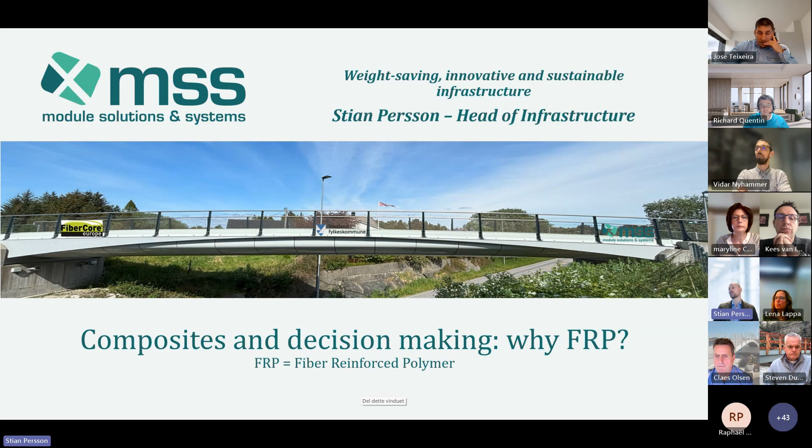I will move on, just a little bit about who we are. The company I'm representing, MSS, has a 20 year history of offshore solutions.

The last 6 years especially, we have really driven the focus on shore and on bridges. By now we have delivered 12 bridges in Norway in FRP, and number 13 is actually in detail engineering now and will be installed in June next year. So we're starting to get some experience here.

We work as an agent in the Nordic countries, but we're also the owner of FiberCore Europe, which has delivered close to 2,000 bridges worldwide. So this is nothing new. I can mention that FiberCore is specialized in vacuum infusion, and they're using the InfraCore Inside technology.

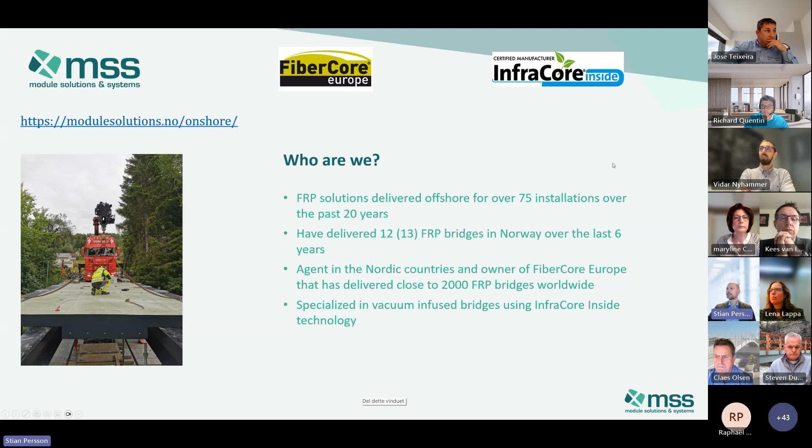Just a little bit of my background, because what I'm going to start speaking about and the bridges I will mention is based on my previous experience as the client side. I started out with 11 years in the Norwegian Public Roads Administration, and it was really there it all started back in 2014 when I was the head of the bridges section there.

So the 2 bridges I will mention later are in the background of that. That's why I just wanted to show you this background so you get that experience. I also have experience from the consultant side, following up the bridges and supporting the client when it went over to the county, and now I'm the head of infrastructure in MSS.

Okay, you probably have noticed Paradis pedestrian bridge, which is a world record and also one of the Innovation Award finalists in the JEC world.

So I will just tell you a little bit about the timeline of this bridge, because it all started in 2014 when I was in the lead of the NPRA, where we started to look into a preliminary design and concept approval for a bridge in FRP. This took a year, it's a big process, a lot to learn. At that time, we hired in Royal Haskoning, and also used consultancy Multiconsult to do everything around the bridge.

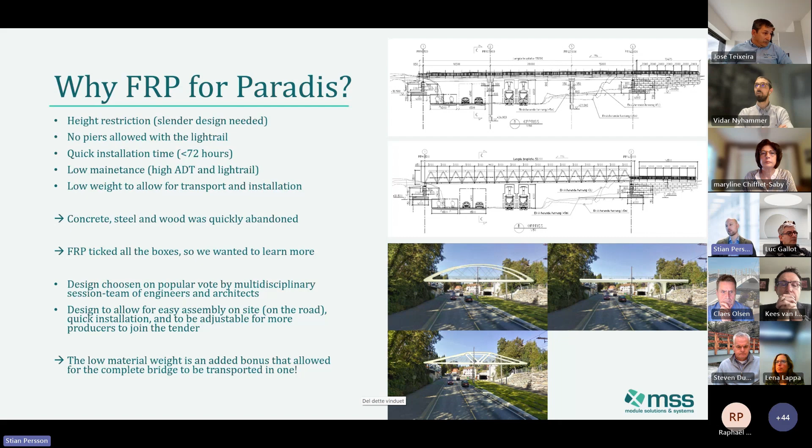And it turns out that the low material weight was a pretty good added bonus that actually allowed us to build this complete structure at once, and produce, freight, lift and install everything at once. So that was a great bonus.

We started looking into the concept design in 2014 and 2015. At that time, we had a new handbook coming out with a new demand: the underside and edges of any bridges spanning over railways, light rails, 4-lane highways, or roads with annual daily traffic of 8,000 or more, had to be made out of materials that need no planned maintenance. That rules out steel and wood. So this was really the push we needed to go forward with something different.

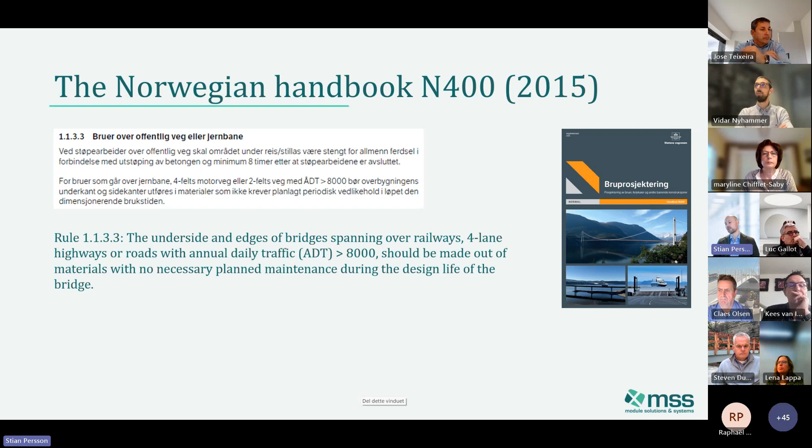It's worth mentioning that from this year we also have another edition in the rule book saying any choice of bridge type and material has to be justified and optimized with regards to sustainability and emergency preparedness, so we get the CO2 emissions into account. It wasn't a point when we started, but now it is. It turns out FRP is actually half the CO2 emissions compared to concrete, so that's another added bonus.

So we had solved the restriction and bridge concepts. How did we put this out in the market? We had never done this before. We knew we wanted to test this out, but going out with a world record for the first bridge was a bit risky. So we had another bridge, half the span, around 24 meters, called Vardebrua, the first one I showed. We decided to divide the substructure, the abutments, from the superstructure so we could get just the producers in and work together with them. We decided to go for a design and construct contract with negotiations because we knew we weren't able to nail it right away.

The substructure was done by the NPRA themselves, when I was there. The concept design was done in 2019. We also had Royal Haskoning with us at that time. It tendered in 2020 and opened now in 2022. This was built by MSS and FiberCore.

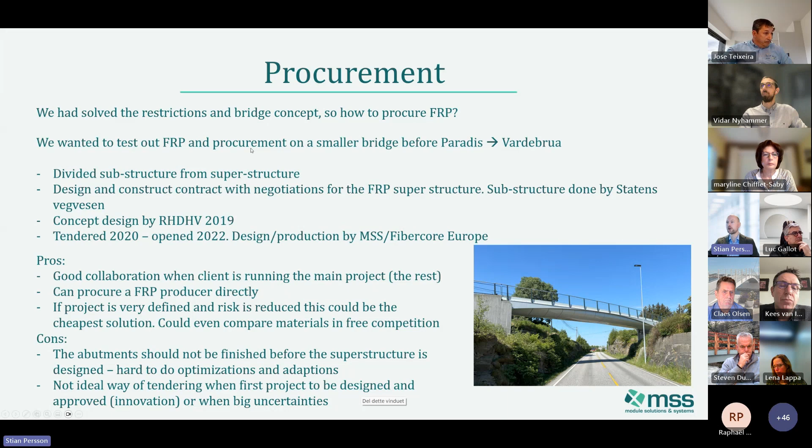So what we learned from that process is that we needed an extra process to reduce that risk. For this part, we decided to add an interaction phase in the design-construct contract. We still divided the superstructure, and I actually engineered the substructure here. The first phase was a collaboration phase, based on hourly paid work, until the complete design was approved by the authorities. This was a very good way of collaborating - we were able to work together, and everybody brought their background and experience, which gave us the best result.

After the design was approved, the price was set and it was turned into a standard turnkey contract. Of course, the client has to take more of the risk in this phase, but this is the only way to get innovation. Somebody has to push this forward, and it has to be the client. So it's very ideal for learning.

Finally, we did struggle a bit with the rules when we all started. Back in 2014, we really had not much to look at. We had the Dutch CUR 96 version, and first in 2019 we got the English version. But based on this process, the newest version of the handbook now has opened for using any of these standards, both the English CUR 96 and the Norwegian DNV rules. We did comparisons, both in early stage and later in detailed design, between the two standards, and they are pretty much similar.

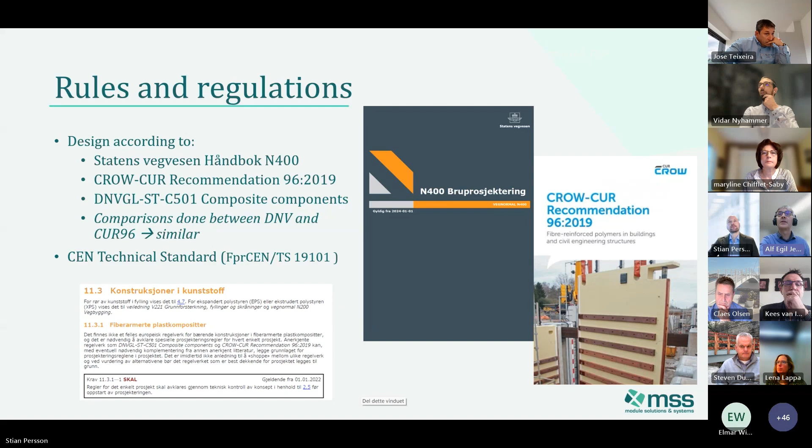It shows now in the picture. It shows. Okay. Yes, thank you.

My name is Alf Jensen. I am the CEO of FiReCo, working with structural engineering for this bridge. I'll talk a little bit about the regulatory framework and design of composites. So switch to the next.

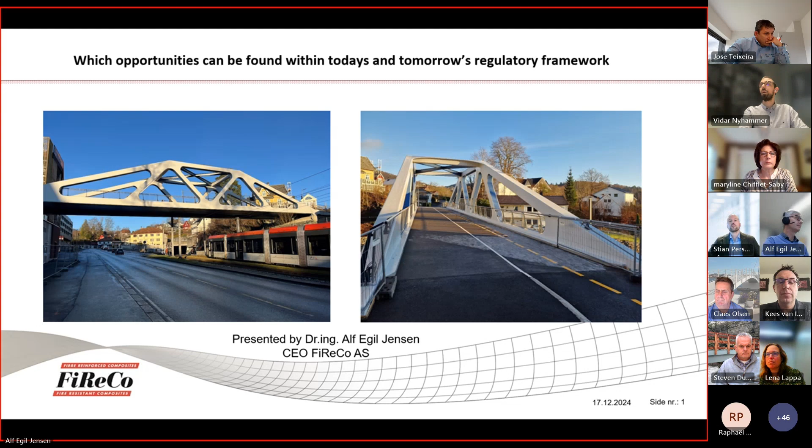Our company was founded 30 years ago, and our core business is engineering and consultancy within large composite structures like ships, boats, and offshore structures, but also in recent years, some bridges. You could look at our homepage to see more of what we are doing.

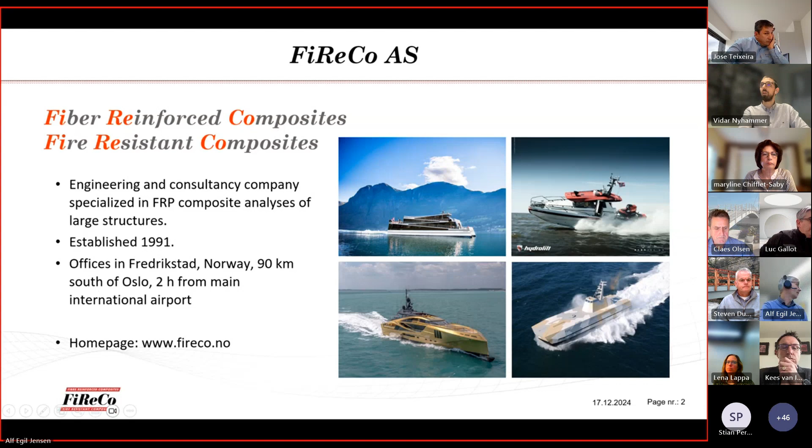The bridges we have done: in 2003, we had the 56-meter movable Fredrikstad Bridge. It was the first large movable composite bridge in Europe. And in 2020, we had a pedestrian bridge along with a road bridge. It was 9-10 meter elements that were lifted in place. There's also a railroad going underneath the bridge, so it was very important to have a prefabricated solution.

And it's the same for the Paradise Bridge. The city train passes underneath, so we needed something above. Also, we could not stop the city train for many weeks, so they needed a prefabricated solution for this location as well.

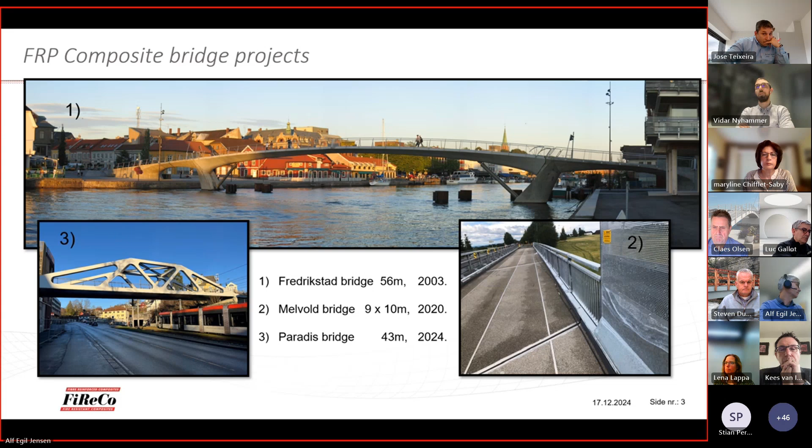So to the rules for FRP composites in Europe, of course it's the Euro codes, for the actions and the structural design, and all of this is standard Euro codes. And as you know, there are standard codes for steel, concrete, aluminum, wood, etc.

But we still haven't got the composite code, though it's under trial. It's now got a number, 19101, and it will probably be in line with the rest by 2025, 2026. So then we'll finally have a complete Eurocode set also for composites.

In Norway, we have a handbook, the N400, which gives the Norwegian special rules and how to do this within Norwegian laws. And as Stian told you, they opened up for using other standards when they are relevant and applicable. So we have used CUR 96, and of course, since we're working with boats, we know the DNV standards, both for offshore, the C501, and for high-speed light craft, which are the ship rules from DNV.

The high-speed light craft rules have had composites since 1985. So a lot of composite vessels have been designed with this standard, so it's a good and well worked-through standard for composites.

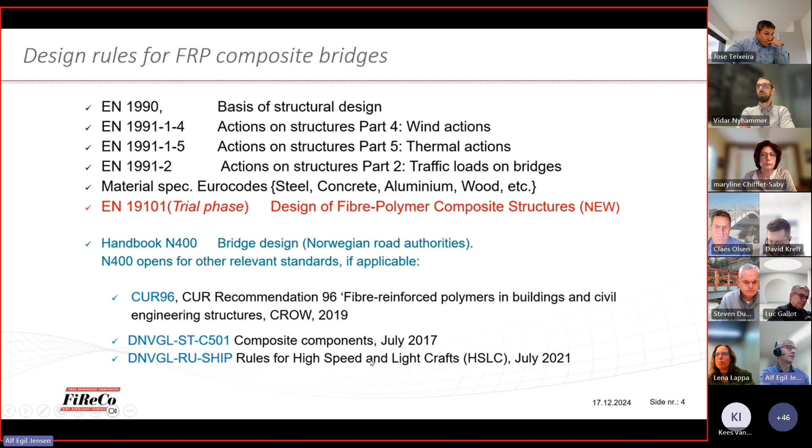So to the Paradise Bridge: it's stated as a new and groundbreaking design, and when looking into the Eurocodes, in Annex B, you see that we end up with consequence class 3, reliability class 3, and this implies the execution class will be 3, and we have full third-party verification of the design.

That could be challenging, and I will go through some of the challenges when you end up in this regime.

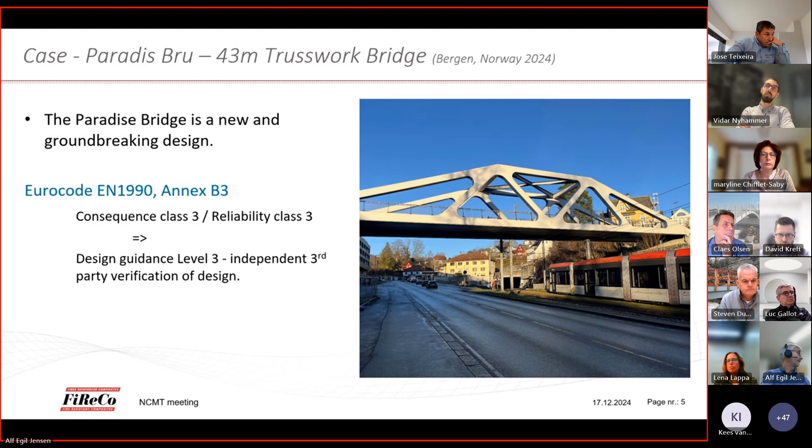In our case, we ended up with an 18-month process with the government, with a lot of back and forth in order to get all the control points in place.

Some of this process was due to our lack of knowledge in using the Eurocodes, since we come from the shipbuilding industry, so we are more used to DNV standards and class societies than the Eurocodes. But it was also a lack of experience in composite materials from the third-party surveyors. They didn't have the same experience as us with composites, so there was some misunderstanding and a lot of back and forth to clarify that.

And since we used CUR 96 and the DNV standards, we had to convince them that these gave the same reliability level and safety level as the Eurocodes.

So there are some inconsistencies in the Eurocode library when you bring in the composite standard, and I think you will also meet this when you use the new Eurocode for composites. It doesn't really fit perfectly at the moment.

So I've given some points here which you should be aware of when you start making the basis of design for composite bridges in the Eurocode environment. I will not go through them in detail, just give you some points so that you can keep them in mind when you start your own processes.

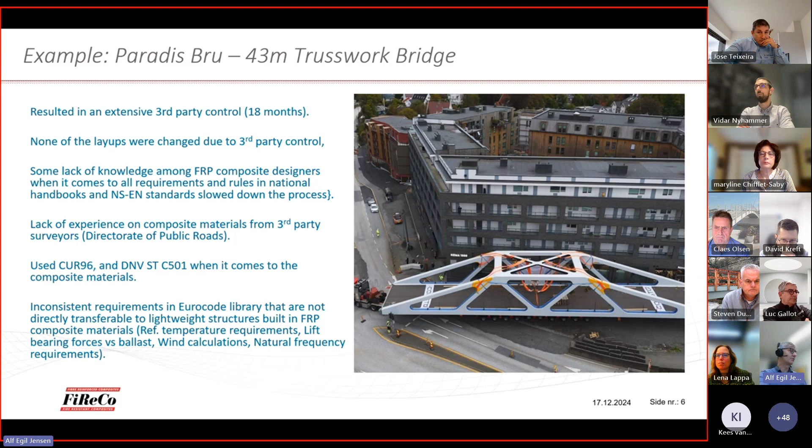Typical for thermal loads, there are typical deck types in the Eurocode. This is for loads, not for composites, so it's the same rules for all types of bridges. But here there's a lack - there's no composite deck. The composite deck is a steel-concrete deck, not a fiber composite deck. So something is missing that should be included.

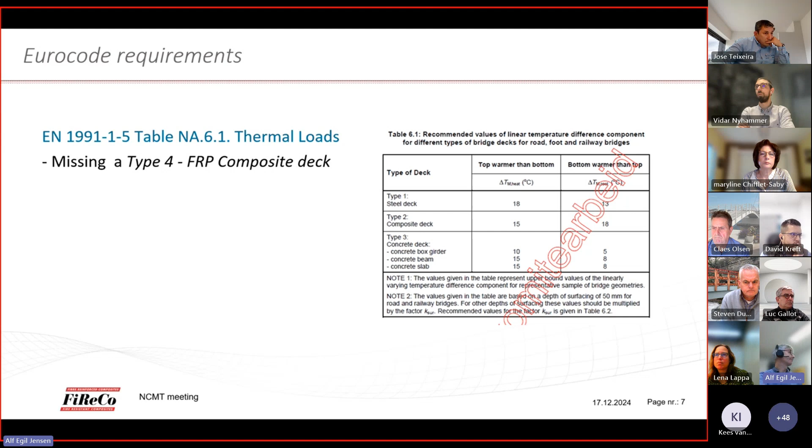Also with thermal loads, this table in the Eurocodes needs to be rewritten. You need extra input on composites, or there should be a link to the new composite standard where you can find standard values for what's asked for in this table.

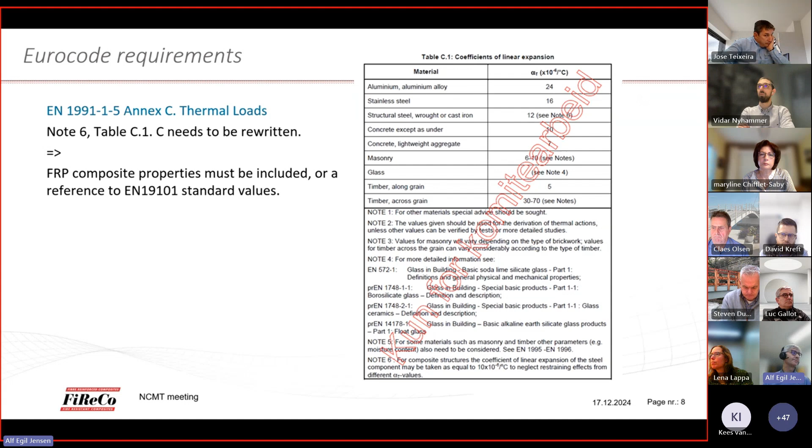Also we have something tricky. In the bridge load classes, the EQU case says you should use a gravity factor of 0.9 and a wind factor of 1.6. For us this gives upward loads on the bearings, and in the Norwegian regulatory handbook N400, it's not allowed to have upward loads on a bridge. So they forced us to deal with a 50% increase in ballast, and of course this makes no sense - first you choose a lightweight structure, then you have to fill 20 tons of concrete on it just to keep it down.

So there are regulatory issues that could be very difficult to convince the owners of. We tried to convince them that in a truss work and a CFD analysis you never get very high lifting forces, but they wouldn't allow us to use CFD analysis as documentation because they only used the formulas in the Eurocodes. So here too they need adaptations for a lightweight structure when it comes to the bridge rules in the Eurocodes.

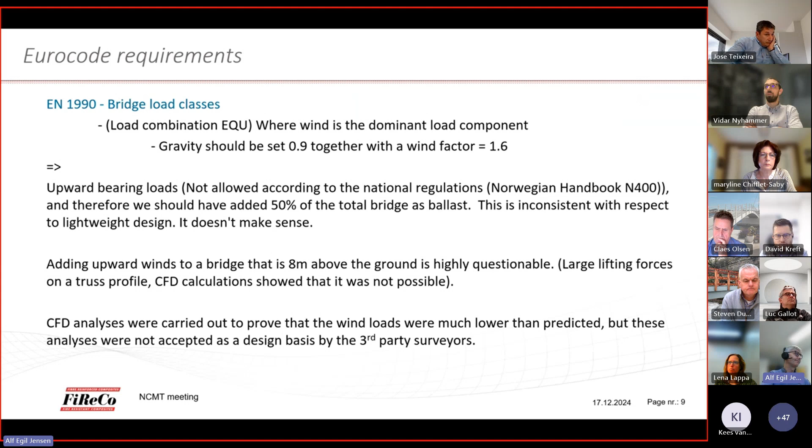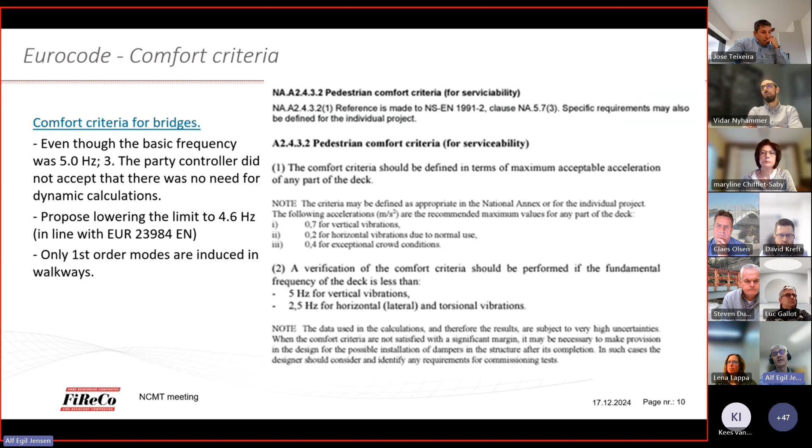And also on the comfort criteria, looking at eigenfrequencies, there should be extra work done on finding a better system and better classes for the eigenfrequency system.

So the lesson learned for us is that with the new Eurocode standard, it is applicable - you can design a composite bridge with this standard. But you will not face a frictionless process when dealing with the rest of the codes. We highly recommend including Eurocode 9 and the DNV standards as basis standards in your IEP and basis of design, because then you can use them to fill gaps and to add more arguments when you need to convince the owners to make assumptions compared to the rules.

Finally, the composite community in Europe needs to cooperate and collect experience from different bridge projects, so we can show that the Eurocodes are reliable and applicable, and develop what we'd call a recommended practice for composite bridges. Because it takes time to change the Eurocode text, you need some kind of recommended practice in the beginning.

It's also important, when trying to convince and start selling composite structures to the conservative market and to low-risk-taking owners, that you need empirical data and successful bridge project stories.

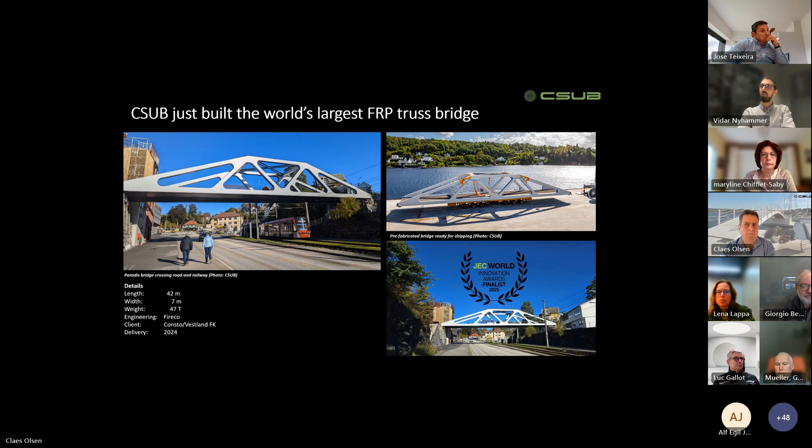Introducing composites, we think is a challenge worth tackling. We've had success in doing that, so we can encourage others to try to do the same. Conservative markets often resist change, preferring tested and familiar materials. However, composites offer undeniable advantages such as lightweight, durability, corrosion resistance, and sustainability. So the goal of this presentation is to explore some of the challenges and solutions for entry into conservative markets, showcase some strategies for building trust and encourage adoption, and we hope to inspire collaboration across the composite industry.

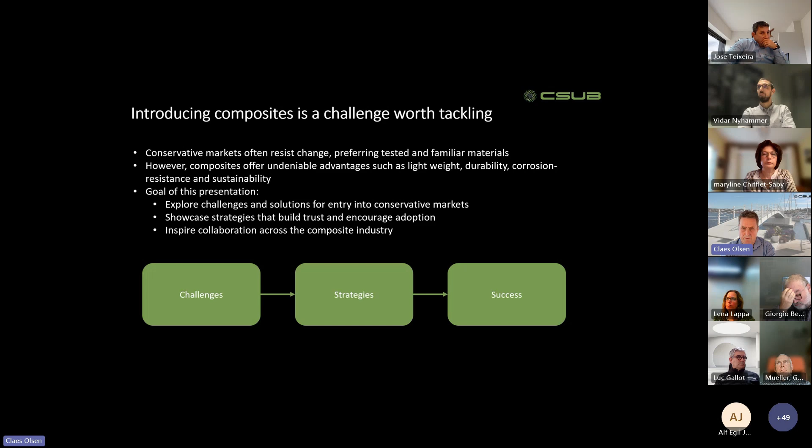As with everything else in the world, it's important to understand the market that you are in or trying to get in. There's a clear preference for proven materials, steel or concrete, when it comes to bridges, because you have well-established methodologies, the same players, their ways of working. It's hard to do a step change in what you do on a regular basis. There's also heavy reliance on long-term performance data, so even if you have documented performance in other markets or industries, it's not automatically adopted elsewhere.

If you look at some of the trends in the industry that help us, there is a demand for more sustainable solutions to reduce the carbon footprint, and an increased focus on making things last and reducing maintenance. So here lies the opportunities as we see them for composites: cost, reduced life cycle cost, sustainability, reduced life cycle carbon footprint, and performance - superior strength to weight ratio and durability even in rough working conditions.

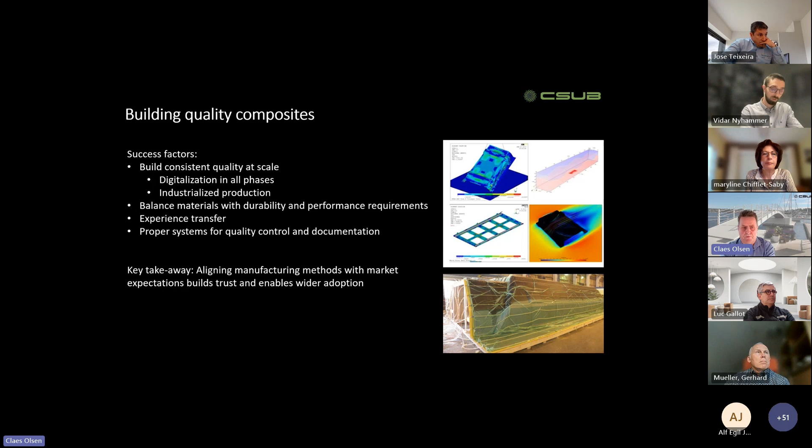So key takeaway from this: align manufacturing methods with the market expectations to build trust and enable wider adoption.

So market penetration takes time. You have to educate the whole industry. You can do that by physical meetings, workshops, webinars to showcase the benefits. Demonstration can be quite helpful - build small-scale pilots, build special critical components where clients may be in doubt, and enter into partnerships with industry leaders or early adopters to drive credibility.

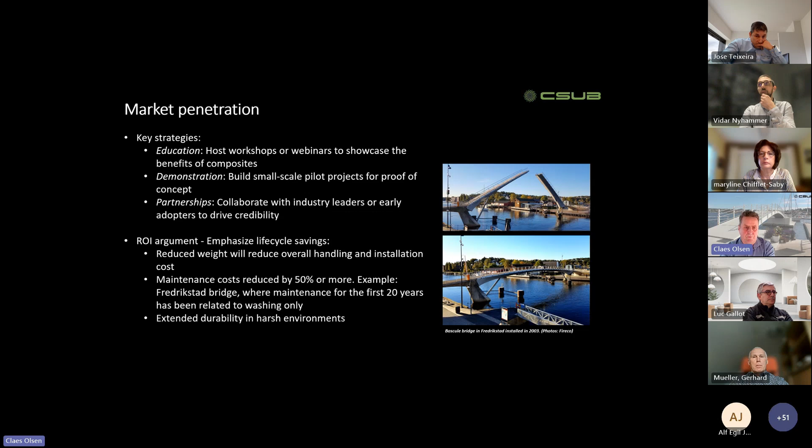Then, of course, you have the cost, the return on investment argument, and it's important to emphasize the life cycle savings. The reduced weight will reduce the overall handling and installation cost. Maintenance cost will be reduced by 50% or more. As an example, the Fredrikstad Bridge that Alf talked about - the maintenance during the first 20 years of operation has basically been washing. And of course, there's the extended durability even in harsh conditions.

For a success story, I think we could show several, but the bottom line is that you have to find the launch product when you go into a new market. Some of the drivers will be related to cost, which in most markets is still the most important, and increase in design life - for example, components subject to corrosion, wear, or other reasons - and increase in performance, making something better, opening new ways of transportation and installation. You need one or more of these drivers for your launch product.

And once you have convinced the client that this is the way to go, you need a combined effort to bring all the stakeholders on board. Start with the end users, the engineering company, the contracting company, the third-party verification entity, and not least the authorities. What we have seen is that once you get acceptance for one product in an industry, it's a lot easier to build on that and launch other products - maybe not with the same advantages as the launch product, but still you are in the game, and you have gained the confidence that is needed.

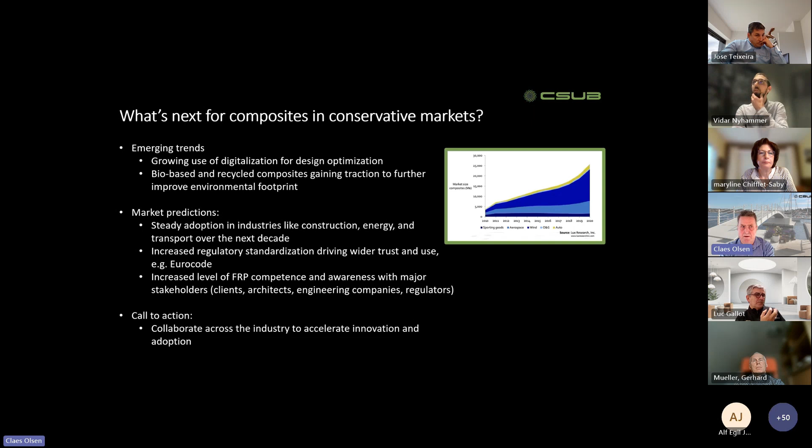Key takeaways: composite structures have a lot of benefits - lightweight, durability, sustainability. Path to market: invest in manufacturing quality, there's no room for failure, we have to know what we do in the manufacturing. Navigate regulations, early involvement with regulators - that's our best advice. Educate customers and find your launch product.

So call to action: together the industry can transform even conservative markets and meet the challenges of tomorrow.

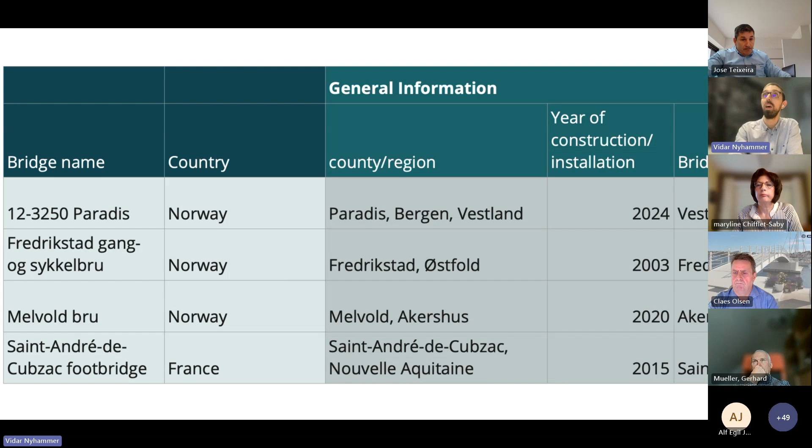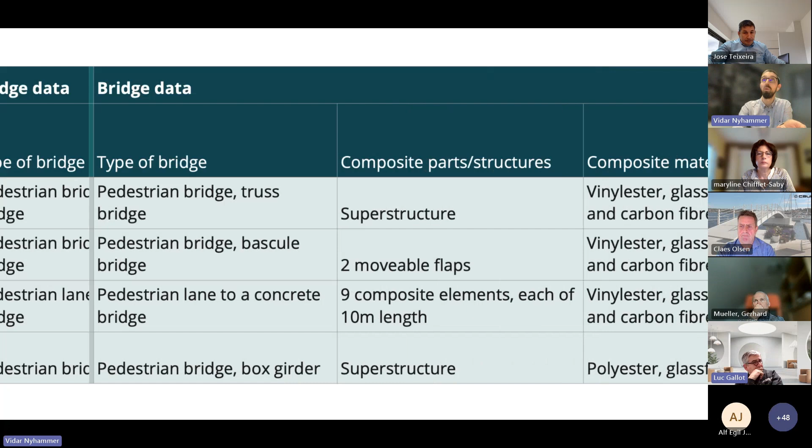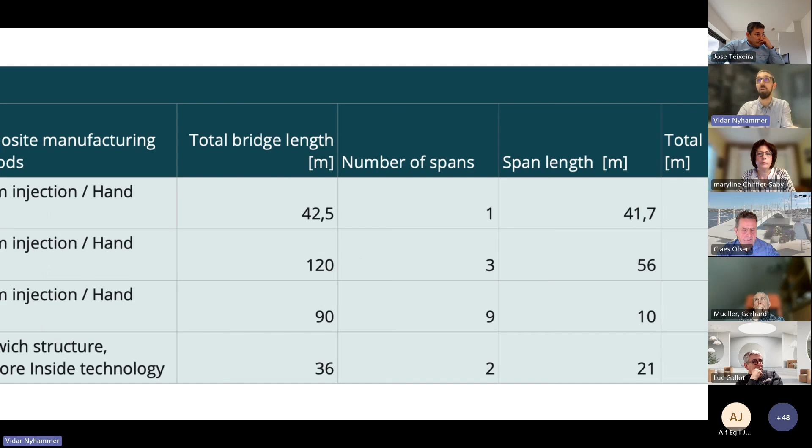I'm just going to scroll through it here sideways. We will start with information about the bridge itself, who has built it, who has approved it, who has engineered it, then going over to the bridge itself, saying a bit about what kind of bridge, what composite materials are used, how it was made, and then we get into the engineering metrics that are crucial for the approval.

And we have to gather this for a lot more bridges to get the background that we need for the processes to go more smooth. We also want to collect the qualitative data, but we haven't yet managed that, but we're going to do that with the existing examples as well.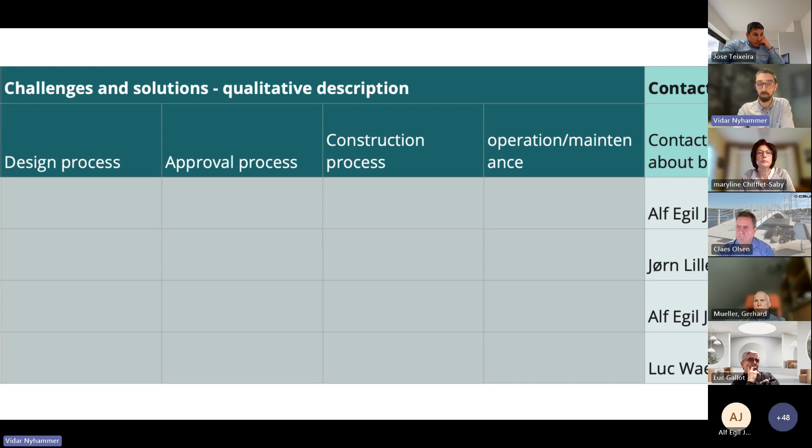We do think that the industry will contribute with this, because we do think that they will see the benefit of the transparency, the benefit of the joint data, creating enough data to educate both the construction industry and the authorities who are approving these things. But the question is, how do we go from 4 examples to a full database?

And this is where you come in. We need you who are attending here to either relay the information, or even better, put us in contact with anyone building composite bridges today. Then we need the composite industry in Europe to unite around the database and to start using the data when we publish it. And we need to communicate both the data and what the data implies.

After this webinar, or most likely early in January, I'll send out a one-pager and a link to a form where you can fill in data for this database. If you're an organization, I need you to send this to your members, encourage them, and remind them over and over again to fill in data.

If you're building bridges, I need you to fill in data in this database, because it's only if we manage to gather enough data across all of Europe that this will have a meaning. But then it will definitely add a lot to each one of your processes with authorities and the construction sector. So then we can bridge the gap with composites. Thank you very much.